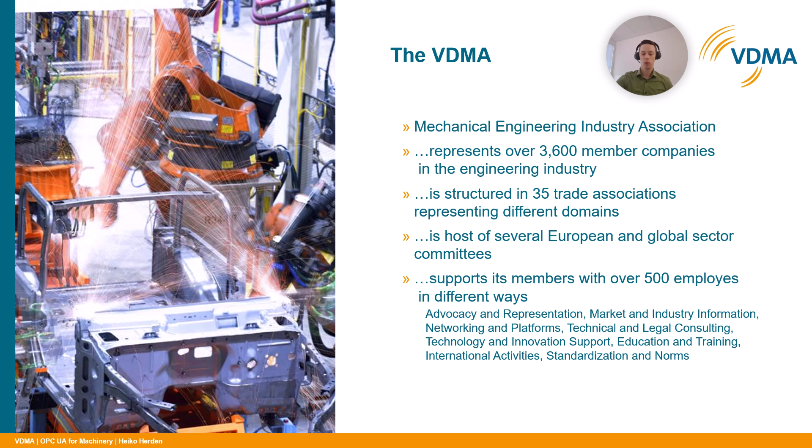So if I say standardizing information models, why do we need it? At the moment, there's many buzzwords flying around, and all is around Industry 4.0 and smart production. There's buzzwords like Internet of Things, condition monitoring. A very big buzzword at the moment is artificial intelligence.

Then you also want to do predictive maintenance in these times, where you exchange some parts before they actually break down so that your production can keep running. You want to do traceability, to know where your part is coming from, which materials went into that part, maybe also what's the CO2 footprint of that. You want to save energy costs by doing load management. You want to do remote services. And of course, there's also the big buzzword plug and work: you buy a new asset, you plug it in, and it works.

And to fulfill all these buzzwords, you need to have one thing in common: you need to be able to access the data, the information coming from the shop floor. That means easily accessible and standardized shop floor information is the key. And this is the economic driver to do standardization in the field of interoperability.

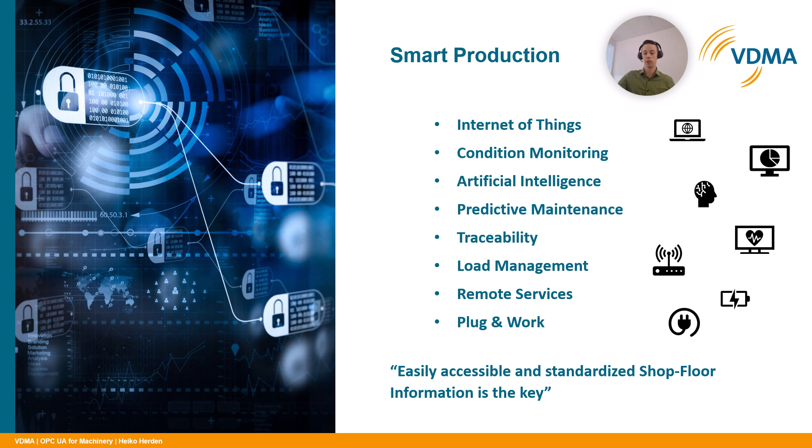It needs to be accessible easily, securely, comprehensively, and structured. And this is valid for all the data generated during the operation of a connected product which was put into the market in the EU. So you can see, on the one hand, we need the data for all these buzzwords that I've already shown that you want to do from your side, but you also need to have this easily, securely, comprehensive, and structured data available to fulfill the regulations.

How do we do this? By using standards, by creating a manufacturer-neutral interoperability. It's a big word, interoperability, but you already know it from your consumer environment. For example, if you buy a phone which supports the Bluetooth standard and you buy a car which supports the Bluetooth standard, then you usually can connect those two devices and it will work.

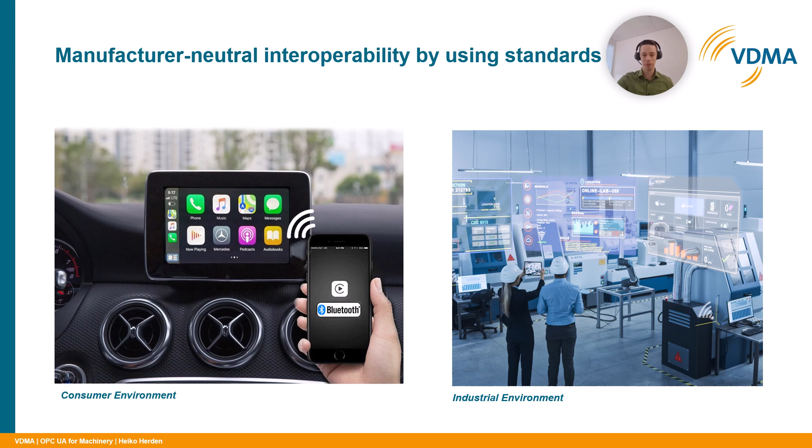That's plug and work. And that's what we also want to achieve in the industrial environment, to be able to connect different assets with each other more easily and also to use the data these assets produce. But the problem is that the industrial environment is way more complex than the consumer environment.

Here's an example about the complexity of the machine building industry. So I brought pictures of different kinds of machines. You can see here, for example, a geometrical measurement system, a machine vision system, a machine tool, a weighing scale, a robot, or a winding machine. And as you can imagine, all these machines not only look different and work different, but also the data that is produced and transferred looks very different.

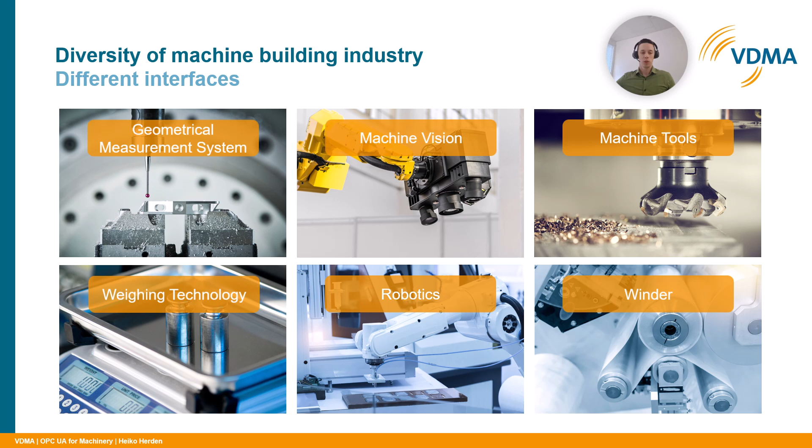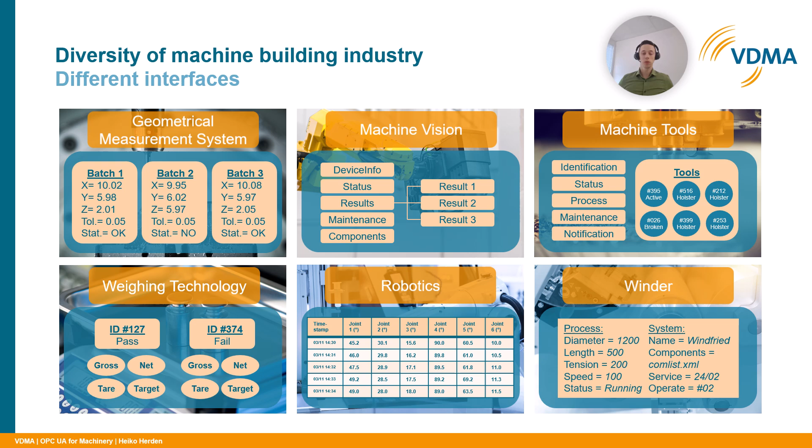So all these machines at the moment have very different interfaces. And without standardization, someone who is not familiar with the machine will have big troubles to understand the data and to work with the data. But we want to create interoperability. So how can this be solved?

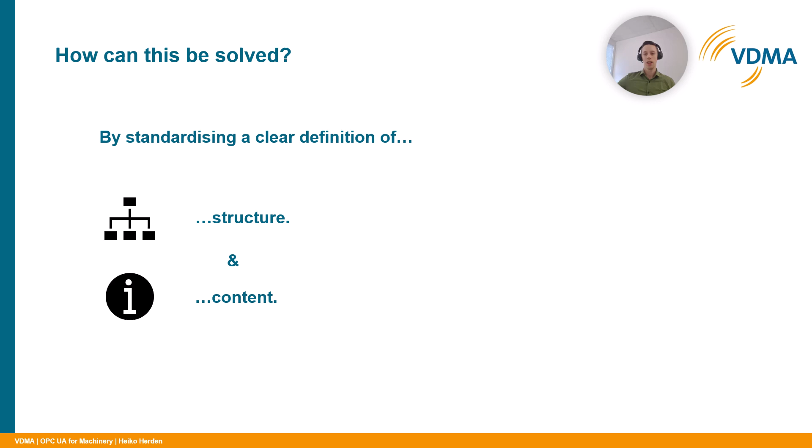The answer to that question is by standardizing, by standardizing a clear definition of the structure and the content of this information. For this, we use OPC UA in combination with companion specifications. The upside of the OPC UA technology is that it comes with a lot of benefits that we need to achieve our goal of interoperability.

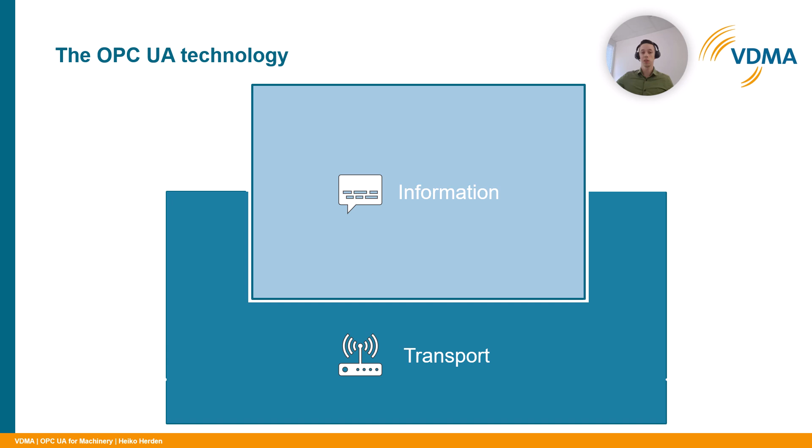So we can do information modeling, but it also has discovery services as part of OPC UA. It has security built in by design, and it has different transport mechanisms, so we can have a one-to-one connection as client server, or a one-to-N connection as publish subscribe. But for us, the important part is really the information model.

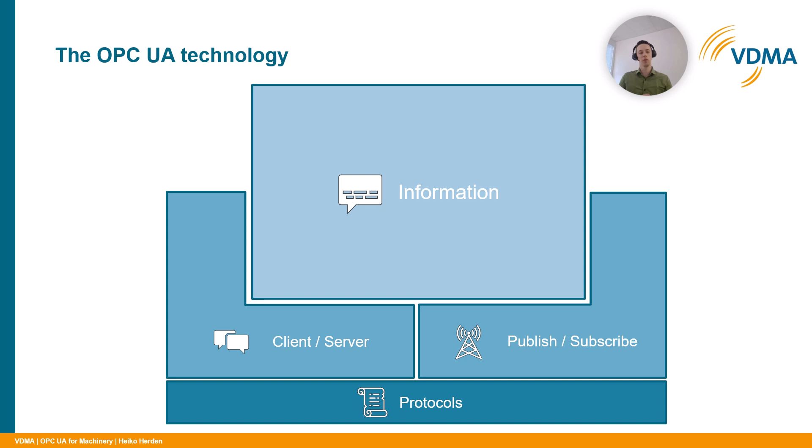We want to do information modeling. We want to say, what is the structure and the content of our data? For that, we also use the OPC UA meta model and the built-in information models, like OPC UA for devices, that are already existing under the hand of the OPC Foundation. On top of that, we define OPC UA companion specifications. For the field of mechanical engineering, the VDMA always takes part in that, also to do harmonization.

On top of that, I can still do some vendor-specific extensions of the information models. This can be done, for example, if I have some data points that I don't want to standardize with my competition because I'm the only one who delivers them anyway. So this is the overall picture of how it could all work.

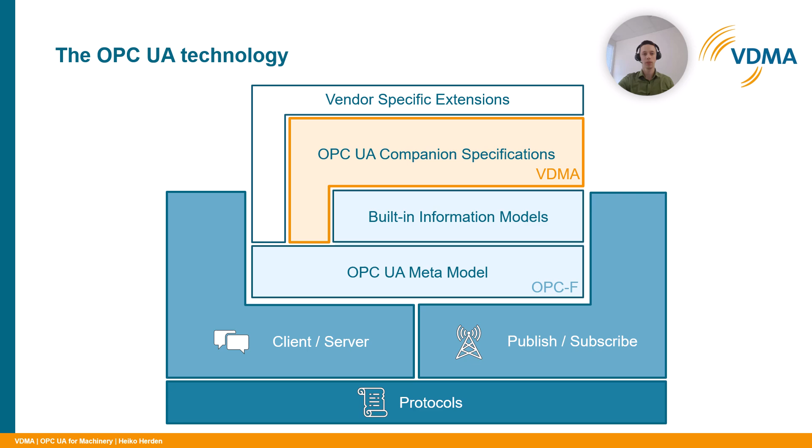For us, the important part are the OPC UA companion specifications. These are already published in a great amount. As you can see here on this slide, we have more than 120 publications already. These specifications are already out in first, second, and third versions. Often some content is added in future versions.

Here you can see in bold letters that the OPC UA for machinery specification, which this is mainly about now, is already out with several parts. We also have a lot of domain-specific specifications, like for robotics, metal forming, mining, wire harness manufacturing, flat glass cutting, weighing technology. There's really a lot. You can see if you can find your domain in that list.

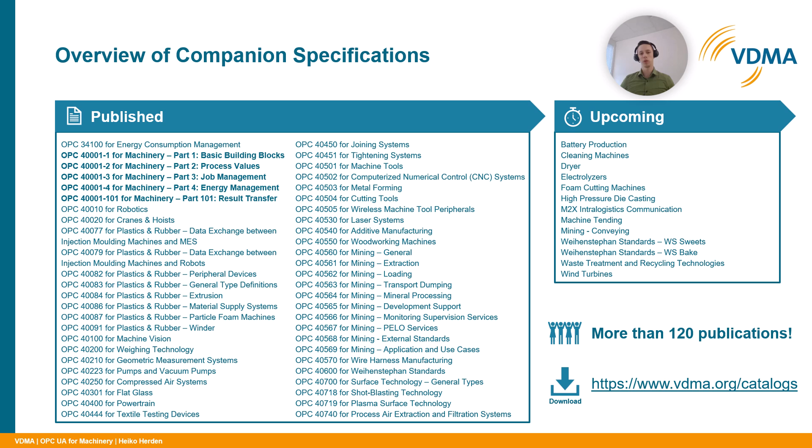You could also download that specification. It's available free of charge. And even more specifications are upcoming, as you can see on the right side, like for battery production, cleaning machines, electrolyzers, and so on.

How does this work together with a harmonized specification? I brought an example which shows that this is overall a modular system. So I have the OPC UA for machinery specification, which is in harmonization as the base. In this, we solve things that are the same for all different assets, like the serial number, a manufacturer name, overall running time of the machine, and machine state. All these things can be solved one time for all to be really interoperable.

If we now look into a single interface, like for example the interface of a laser machine, we will see that it combines OPC UA for machinery for the basic information plus OPC UA for machine tools, because a laser is just a more specific machine tool, so to speak. But then there are some very laser-specific contents in the interface, and these come from the laser specification.

A bit more simple example would be a woodworking machine. There I just combine the base specification OPC UA for machinery with OPC UA for woodworking. For the user, that's pretty easy because the user knows, okay, I'm interested in woodworking machines. I'm a manufacturer of a woodworking machine or a customer of woodworking machines. Then I just look into the companion specification for woodworking, and there I will see that machinery is referenced. So as a user, I only need to look at the endpoint.

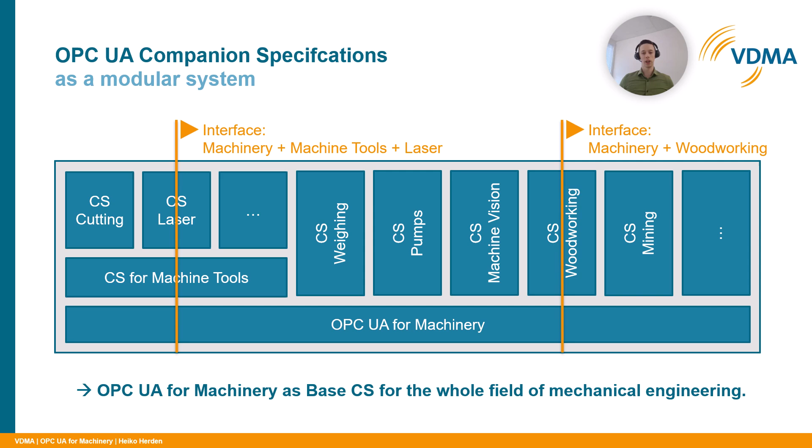So now I talked a lot about why we need OPC UA for machinery and how it really standardizes all the data that is common for all. Next, I would like to give you an idea how such a data model could really look like.

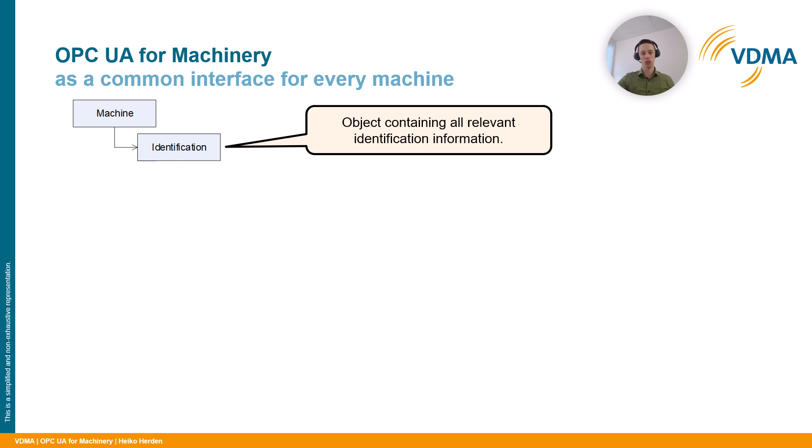So you have your machine, and first of all you have the block of identification, an object containing all relevant identification information. This could be things like a serial number, a manufacturer, a model, a location, or initial operation date, or much more parameters. I just picked out some examples, and overall this is only a simplified and non-exhaustive representation of the machinery model, but it's meant to give you an idea about what OPC UA for machinery is about.

And these parameters mostly come out of the devices specification. We made two mandatory, the serial number and the manufacturer, to ensure an unambiguous identification, and all the other parameters are optional and can be used if required or not. So this is pretty clear. Every machine needs an identification.

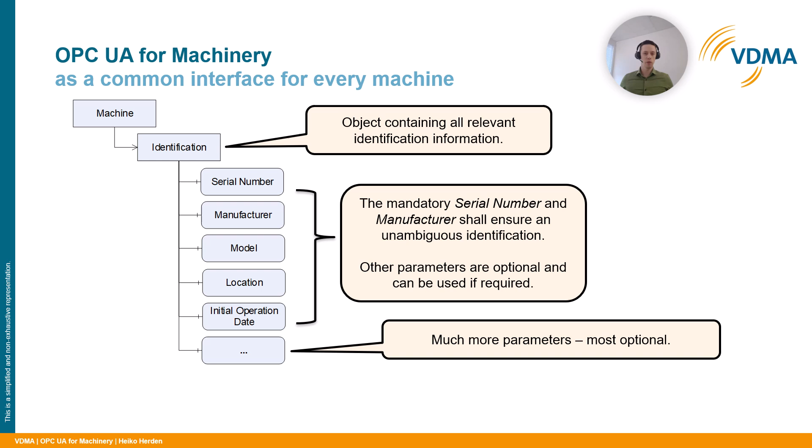But we have more. We also have a monitoring object. In that monitoring object, we have all the information aggregated that is monitoring information. And we divide it into 4 different categories: status, health, process, and consumption. Within these categories, there are definitions as well.

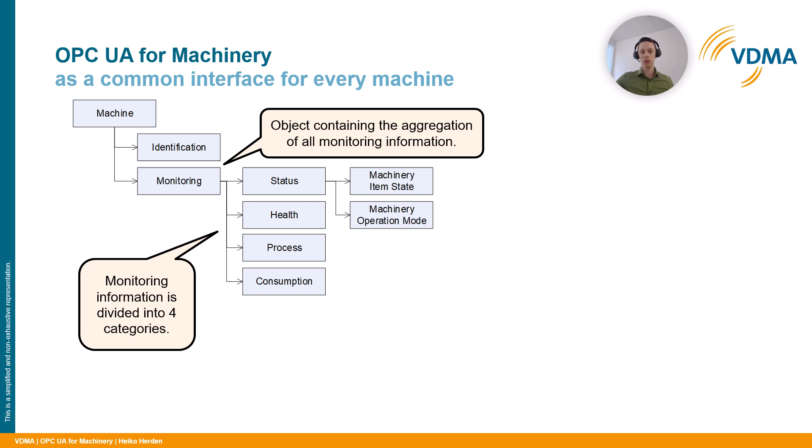So within the status, we have 2 state machines. We have the machinery item state, which defines the state of the machine. Is it currently not available, which would mean we can't reach it? Is it out of service, which would mean it's not operational? Not executing means it could be operational but not working, or executing, which means it's available, operational, and working. And there's a second state machine, the machinery operation mode, which describes what kind of operation is being done right now. Is it a maintenance operation, a setup operation, or a processing operation?

And as you can see, these are the definitions within OPC UA for machinery that you could find in the end in that status folder and the monitoring folder.

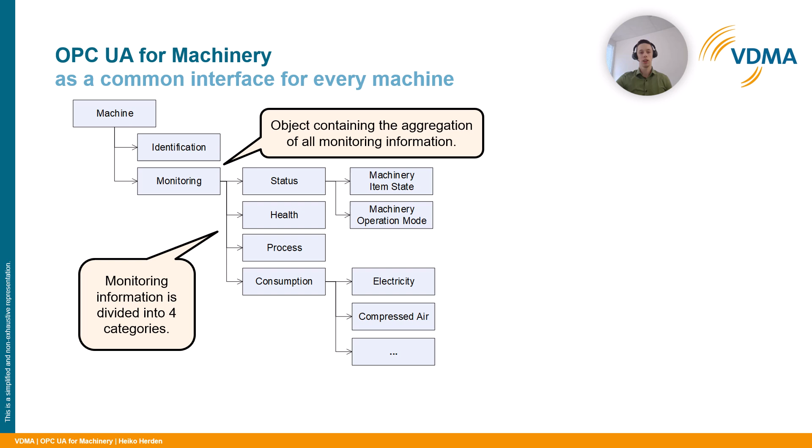Of course, there's more definitions, for example for consumption. There you could have information about electricity consumption, compressed air consumption, and then these again contain different parameters, like for electricity, current, voltage, and power in different ways, or for compressed air, measurement parameters like pressure, temperature, volume, and flow rate. And of course, there can be many more possible media information, for example for steam, hydraulic oil, water, fuel, coal. There's lots of possibilities. All of those you could find in that consumption object.

And this was already standardized in OPC 34100 energy consumption management.

So as you can see, even in that harmonization approach of OPC UA for machinery, we are using a more generic harmonization, which was done in that energy consumption management specification, which looked at all kinds of different energy standards and made a harmonization of that.

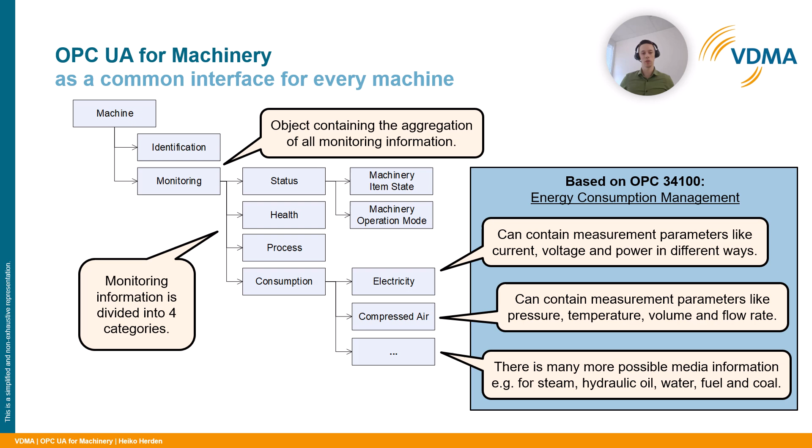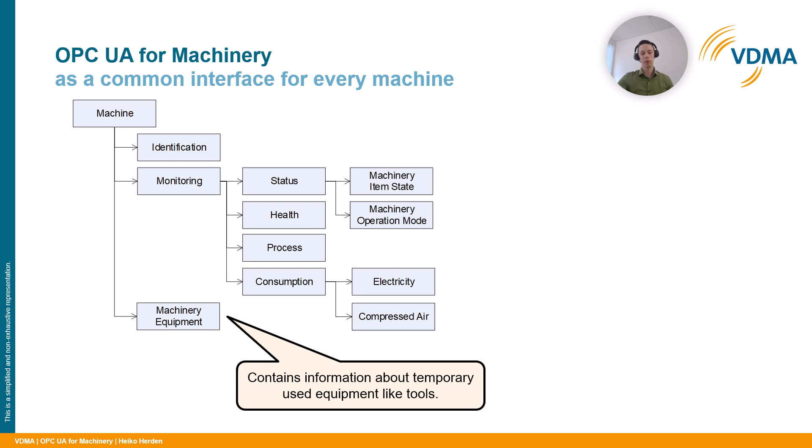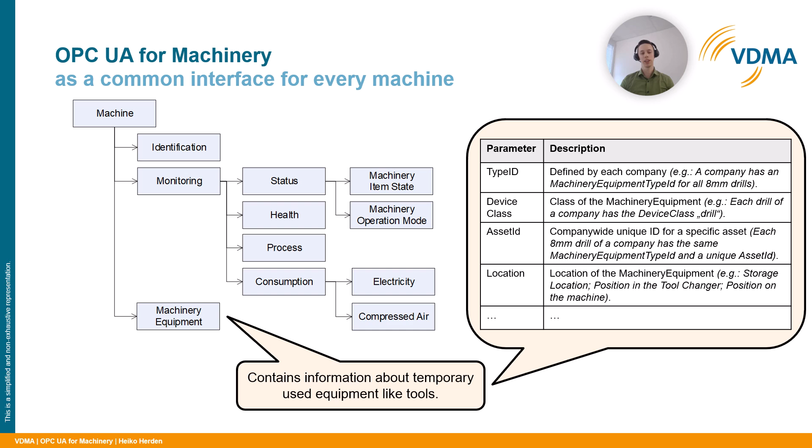Then furthermore, we have the machinery equipment. This is also a folder aggregating all the information about temporary used equipment like tools, and also coming with the definition of different parameters for tools like a type ID, a device class, an asset ID, a location, and some more.

Then on top of that, we have the notifications folder. In that, we have an entry point for all notifications, which can contain events or alarms.

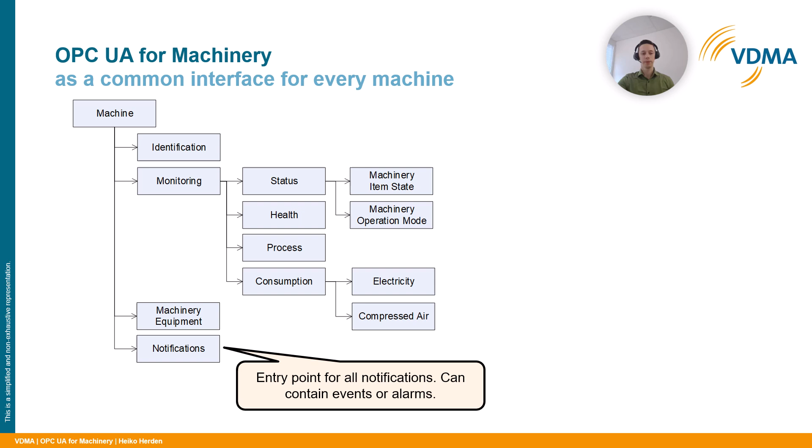And now this might be the biggest block in OPC UA for machinery. We have also the job management. The job management is based on ISA 95 job control. So once again, we used something that's already existing. We didn't start on a white paper or reinvented the wheel. We are always looking what is already defined, then we use it, and if necessary, we enhance it. And in this example, we added a lot of parameters which are needed for the mechanical engineering industry, but overall we are using the concept from ISA 95 for job management.

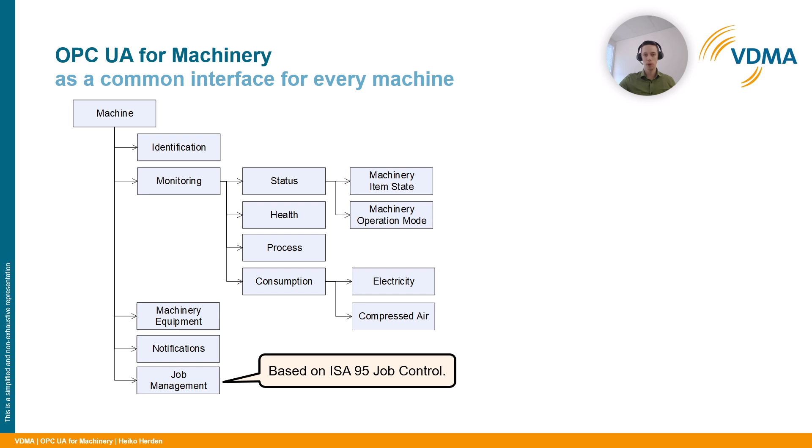And job management means that we have a job order, which comes from a higher level system, sent to a machine with all the data that comes with it. Of course, a job name, but also which materials required, when is it supposed to start, how many parts should be produced, and so on and so on.

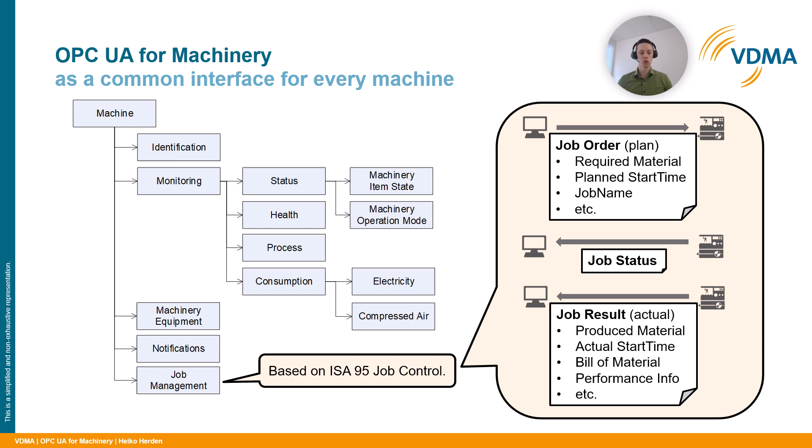In between, I get an update about the job, so I can see how many is done already, what's the current status of the job. And in the end, I get a job result, of course, where I will also get the job name back, but also will know which material was produced, what was the actual start time, what's the bill of material. I get some performance information of the job, so which forces or temperatures were used for creating that product, which I can also use to assure quality afterwards.

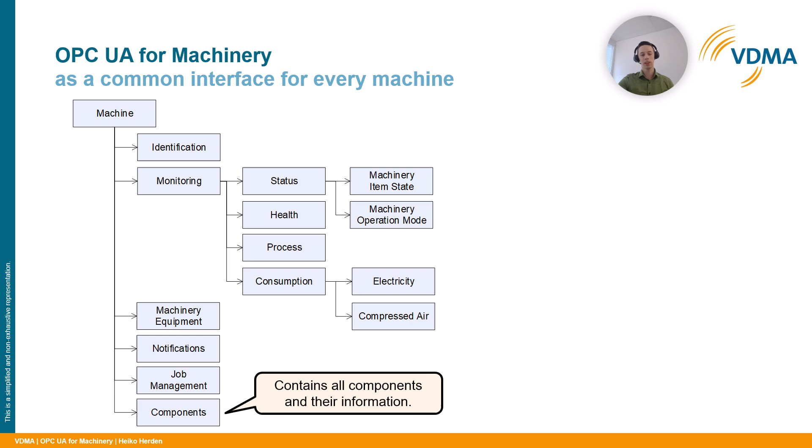And then last but not least, at least for this example, like I said, it's a simplified example, but every machine, of course, has components as part of the machines. And these components, again, follow the same structure as a machine. So in this components folder, I have all the components and their information. And then, for example, here I have two components, and each component, again, has this standardized, harmonized structure with an identification object, a monitoring object, an equipment object, and so on, whatever I need. It's a lot of optional objects.

And here I can have basically unlimited components as part of my machine, and I can even have components as part of my component. And so I think you can really see OPC UA for machinery as this generic approach, which is applicable for all the domain-specific companion specifications.

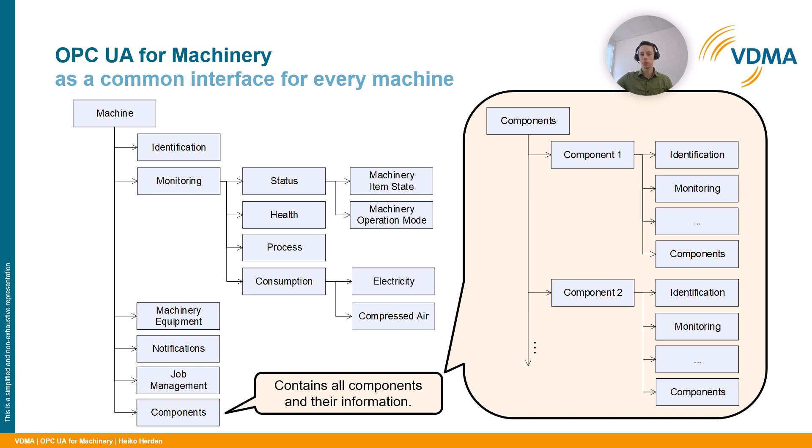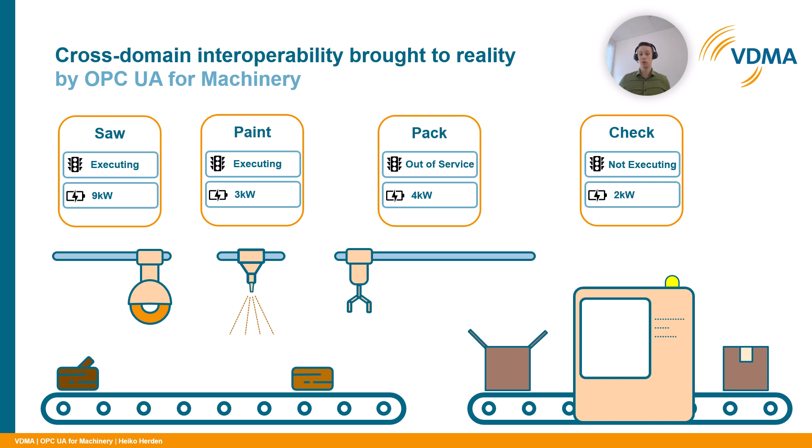And the benefit is quite big because think of a production line. I brought here an example where we have different modules, a sawing module, a painting module, a packing module, and a checking module. And now with OPC UA for machinery, I get the information from them all in the same standardized way. I see how they are named. I see the current status of these machines. I can see the current energy consumption of these modules all in the same way. And this is, of course, great for factory operators to fulfill a lot of different use cases.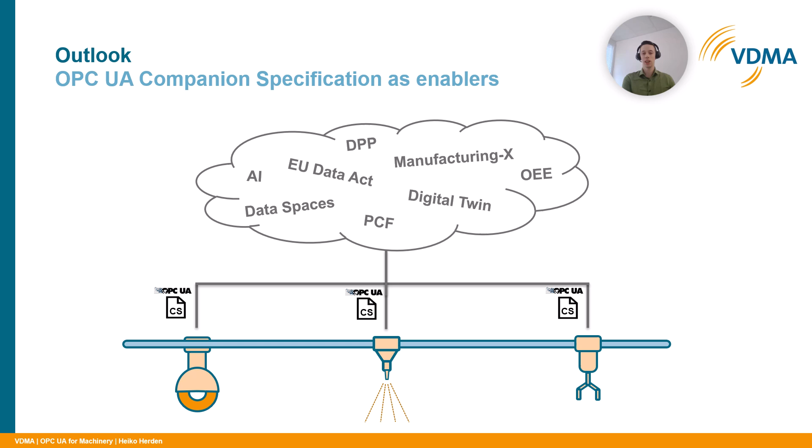And so as an outlook, I can say OPC UA companion specifications, especially OPC UA for machinery, really are enablers for a lot of these buzzwords I mentioned in the start. You can run an AI, artificial intelligence, to work with the data that you finally get and understand. You can fulfill the EU Data Act. You can fill a digital product passport. It can be used for use cases within data spaces or Manufacturing-X. You can use it to fill up your product carbon footprint, to have a digital twin, or to do KPIs like an overall equipment efficiency. So there's a lot of benefits in using OPC UA together with companion specifications and especially the harmonized companion specification OPC UA for machinery.

And so I come to my summary. You saw data is the key for Industry 4.0 use cases. The usage of OPC UA and companion specifications provides secure, easily accessible, and self-evident data. And it's a good starting point to use the harmonized OPC UA for machinery specification.

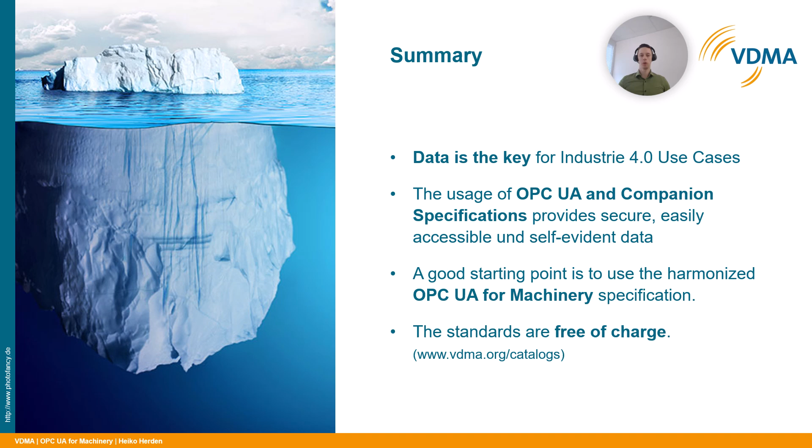So if you didn't use any companion specification yet, then my advice is to take a look into OPC 40001 Part 1, which is the basic building blocks of OPC UA for machinery, which contains most of the things that you have seen in that tree structure that I have just shown you. And all the standards are available free of charge. We put a lot of work into these standards, a lot of companies, a lot of working hours, and we want the community to benefit from it, so they are free of charge available on the page of the VDMA, but also on the page of the OPC Foundation.